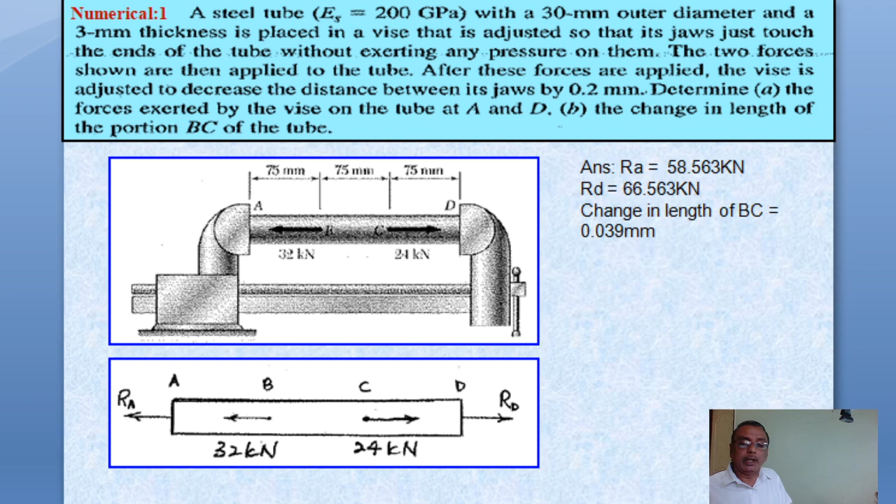Now let's see that numerical. First note down, we will collect the data. So here outer diameter D0 is equal to 30 mm, inner diameter Di is equal to 30 minus twice t, so it becomes 30 minus 6, so that is 24 mm.

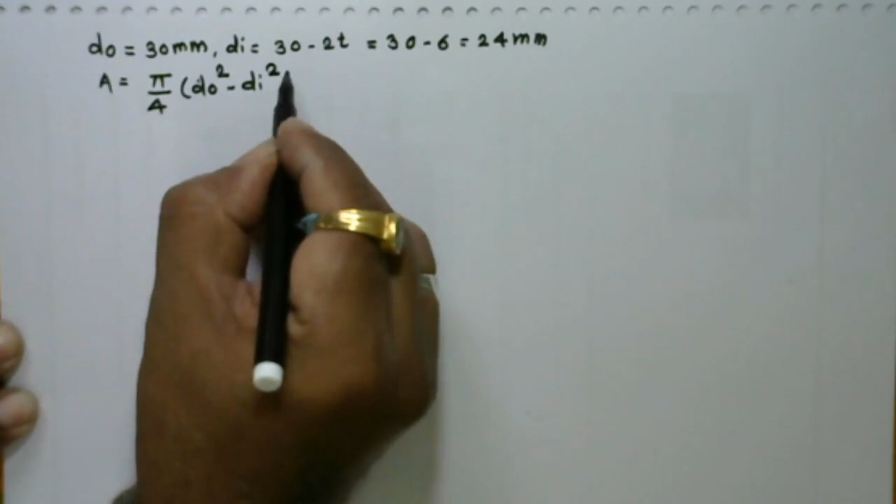Diameter is known, so we may calculate the cross sectional area. Area is equal to pi by 4 times D0 square minus Di square. So pi by 4 times 30 square minus 24 square. So here area is 254.34 mm square, that is the area.

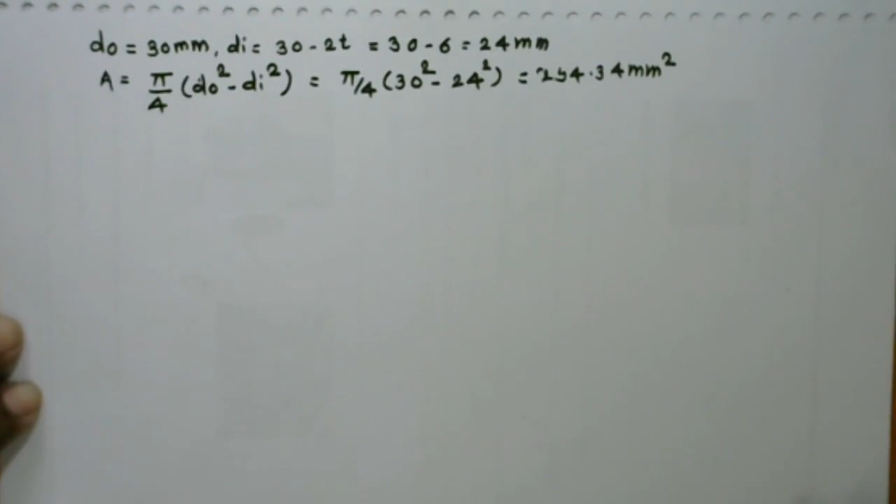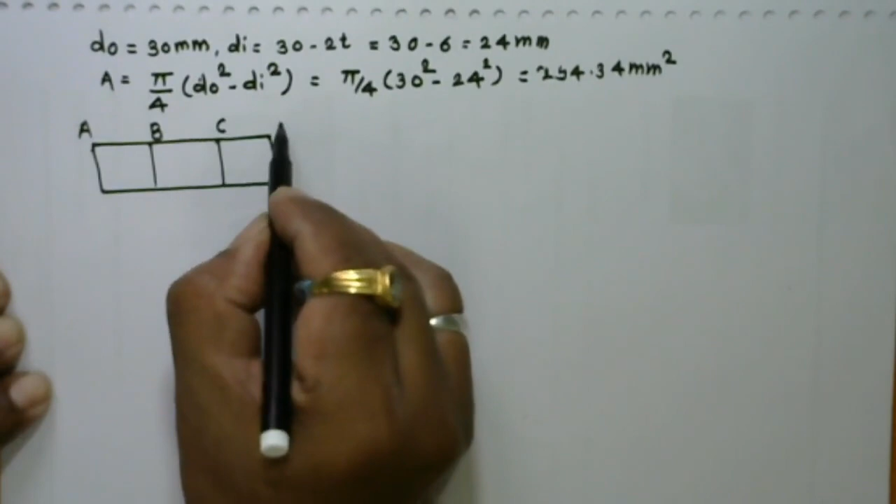Now the figure is given. In that figure we have to concentrate on this side. If we see that figure, there is section A, B, C, and jaw D. Reactions acting at point A, that is RA. Reactions at point D, that is RD. At point B, 32 kilonewton force is acting. At point C, 24 kilonewton force is acting.

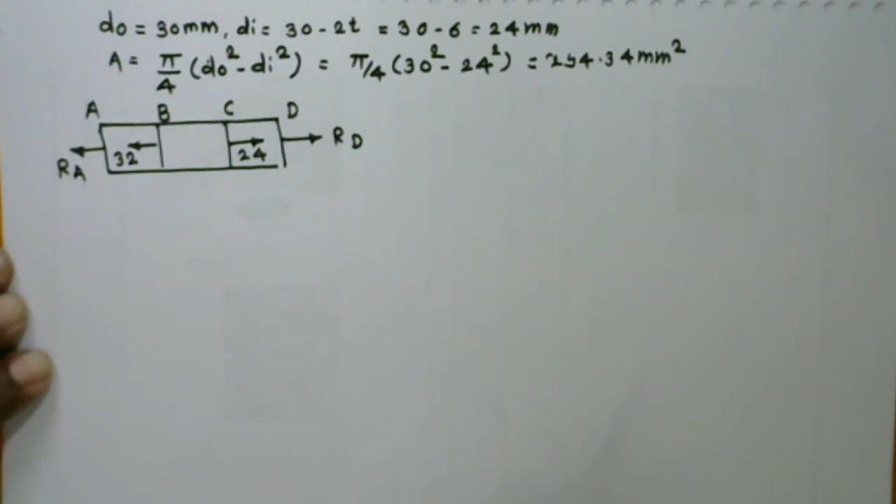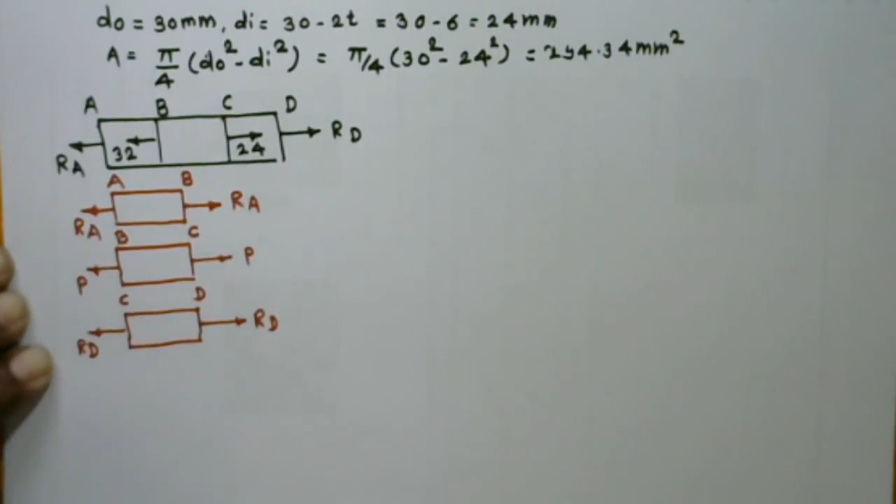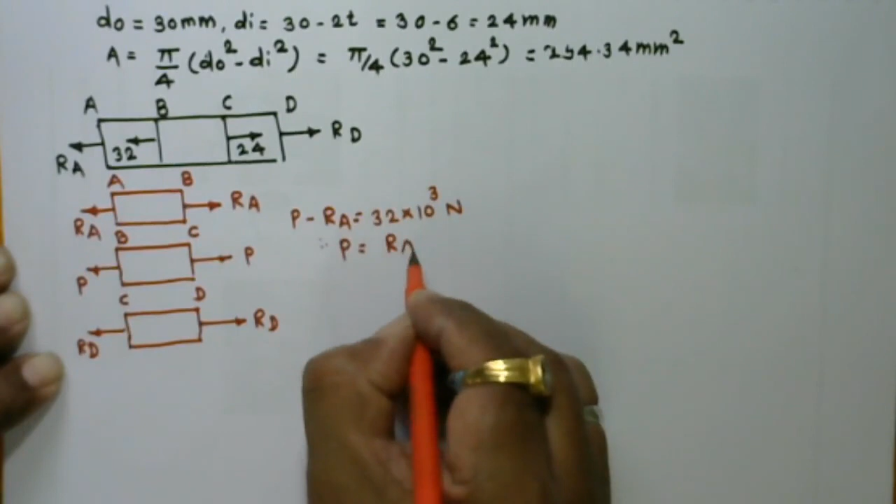According to our superposition law, we may say, if we consider section AB, on AB that is RA. At BC, we may say force P is acting. Assume the force P is acting at point C and D, reactions RD is given, is it right? At point B, 32 kilonewton is going in the left hand side. So you may write the equation at that point: P minus RA is equal to 32 into 10 raised to 3 Newton. So that equation becomes P equals RA plus 32 into 10 raised to 3. Say equation 1.

Similarly, write at point C it is 24. So we may write P minus RD is equal to 24 into 10 raised to 3. Again, P is equal to RD plus 24 into 10 raised to 3.

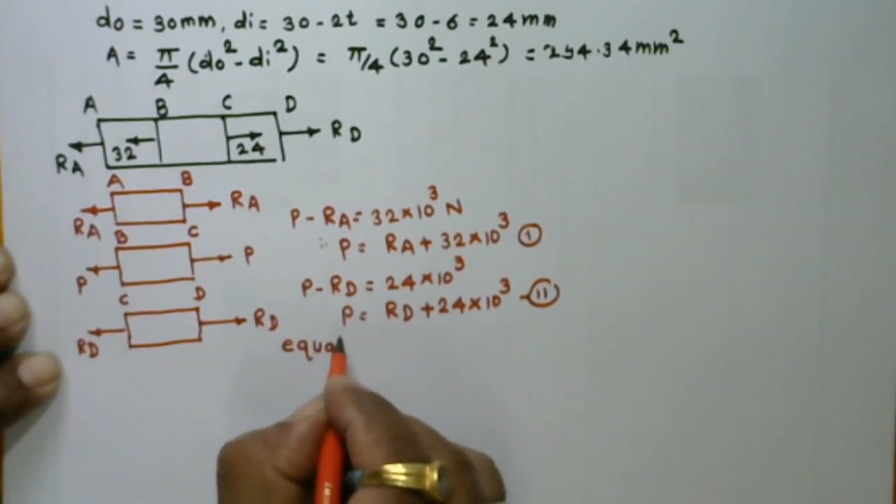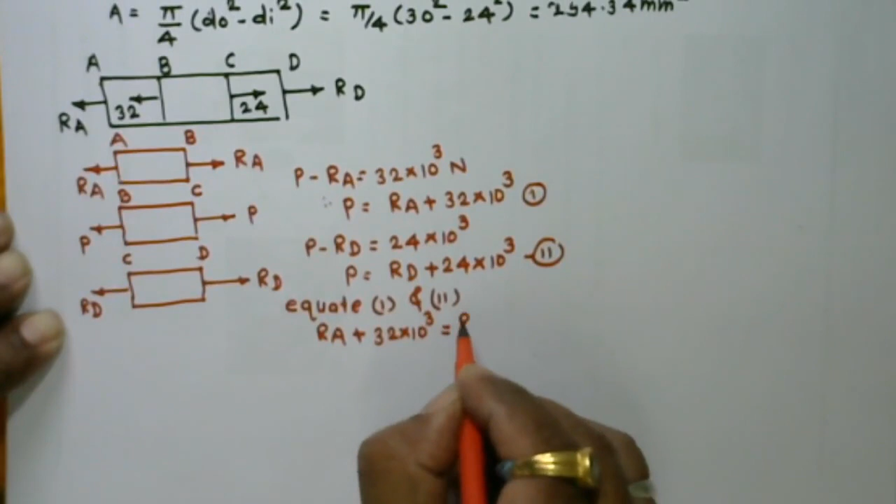So you may equate equation 1 and 2. In that case, RA plus 32 into 10 raised to 3 is equal to RD plus 24 into 10 raised to 3. If I say RD is equal to, we may calculate RA plus 32 into 10 raised to 3 minus 24 into 10 raised to 3. So that equation becomes RA plus 8 into 10 raised to 3, that is RD. Say equation number 3.

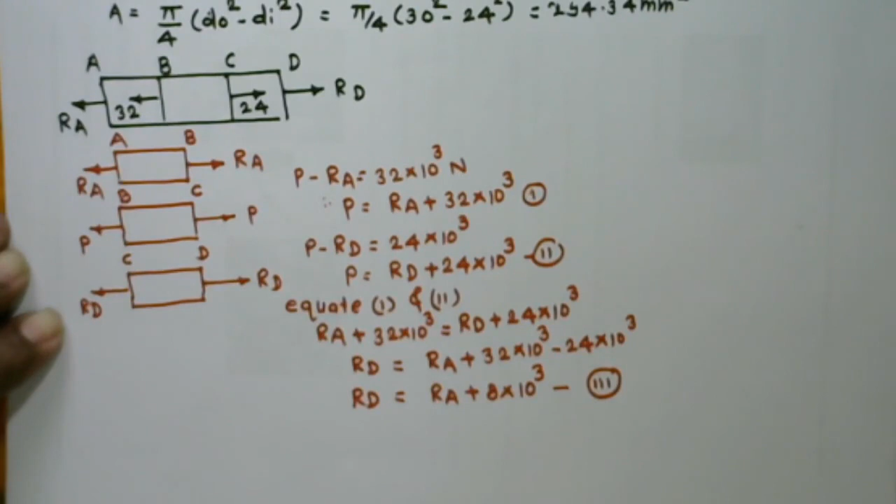Now delta LAB, elongation at the end AB, delta LAB, we may write that force RA is acting on A, so we may say RA into LAB, that is PL upon AE, same equation we have to use. AE, RA is unknown, LAB is 75 mm, distance is given, cross sectional area we have already calculated as 254.34, and E is given as 200 into 10 raised to 3. So that equation becomes 1.474 into 10 raised to minus 6 RA.

Similarly, delta LBC, on BC force P is acting, P into LBC upon AE, P is unknown, length LBC is 75 mm as given in the numerical, divided by area 254.34 into 200 into 10 raised to 3. Instead of P, you may put the value RA plus 32 into 10 raised to 3, or you may put the RD value also here.

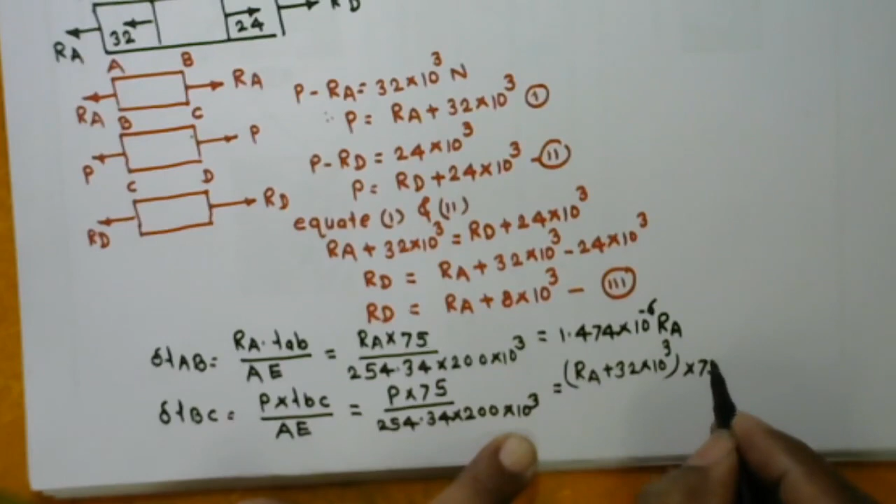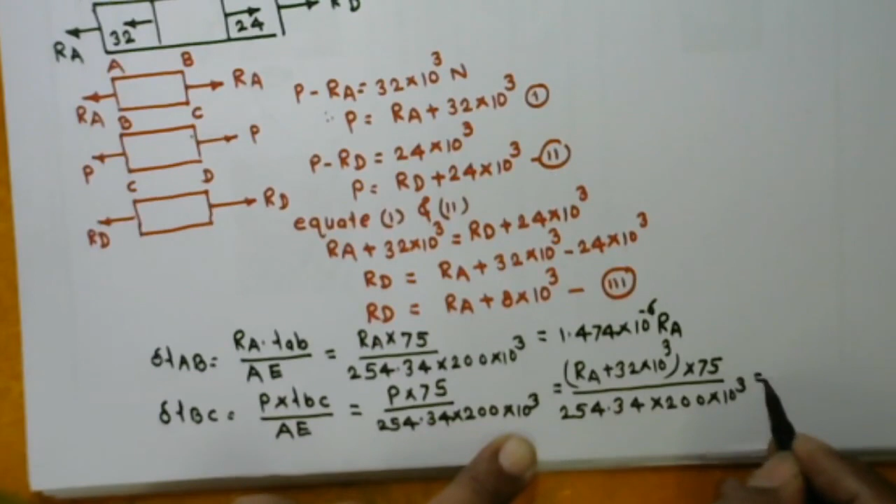So RA plus 32 into 10 raised to 3 into 75, divided by 254.34 into 200 into 10 raised to 3. So here you will get 1.474 into 10 raised to minus 6 RA plus 47.18 into 10 raised to minus 3.

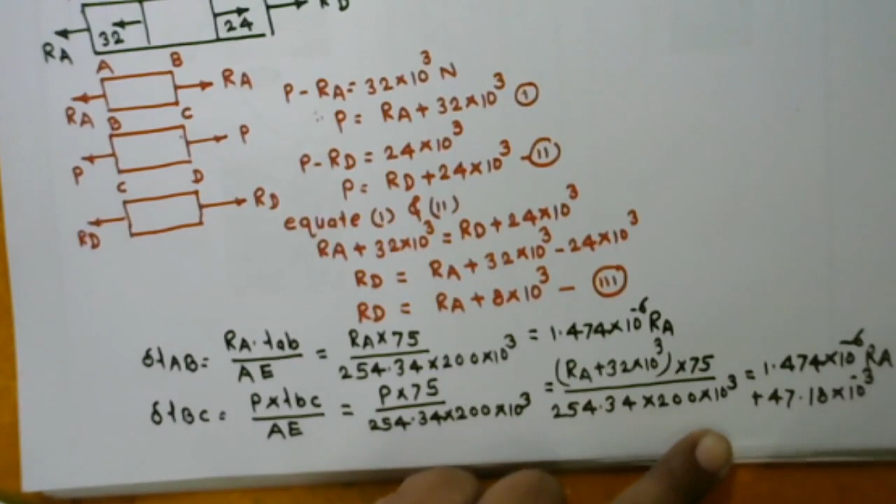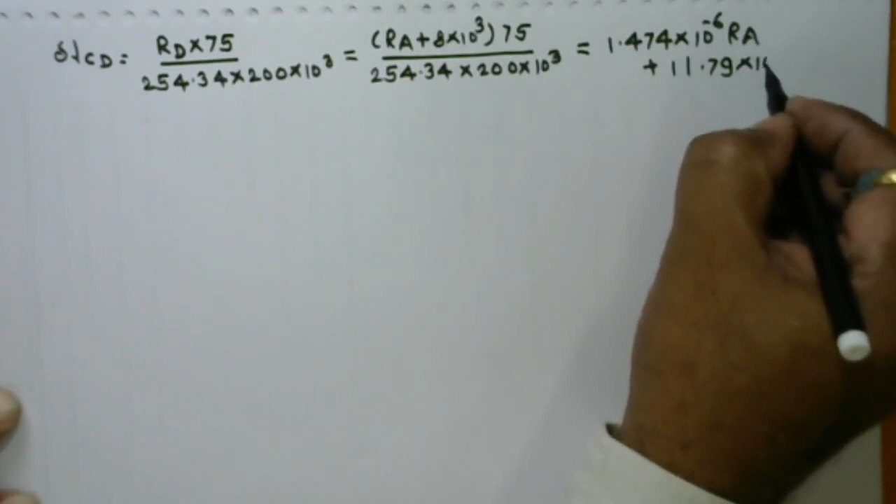Similarly, we may calculate delta LCD. At CD, force is acting RD, again length is here 75, area remains same, 254.34 into 200 into 10 raised to 3, that is same. So here RD is equal to, you may put RA plus 8 into 10 raised to 3 into 75 divided by 254.34, 200 into 10 raised to 3. Do these calculations. After that you will get 1.474 into 10 raised to minus 6 RA plus 11.79 into 10 raised to minus 3, the value of delta LCD.

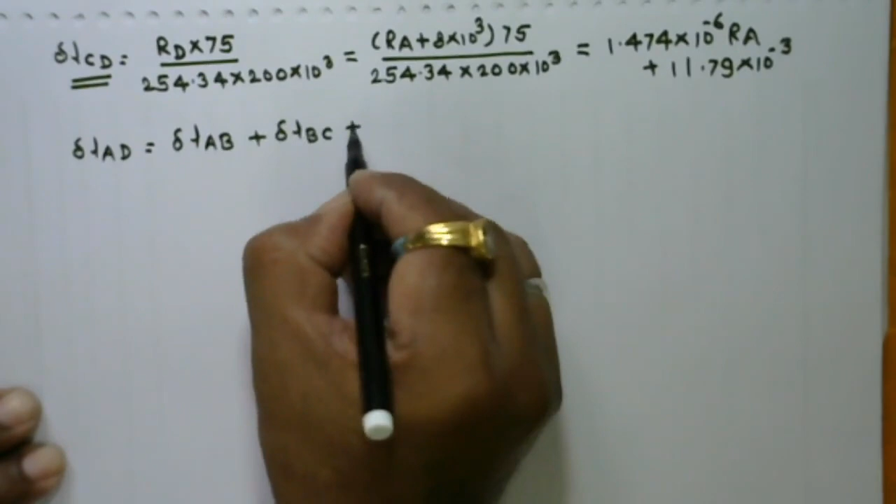Now here total elongation delta LAD is equal to delta LAB plus delta LBC plus delta LCD. Put all this value: 1.47 into 10 raised to minus 6 RA plus again 1.474 into 10 raised to minus 6 RA plus 47.18 into 10 raised to minus 3 plus 1.474 into 10 raised to minus 6 RA plus 11.79 into 10 raised to minus 3.

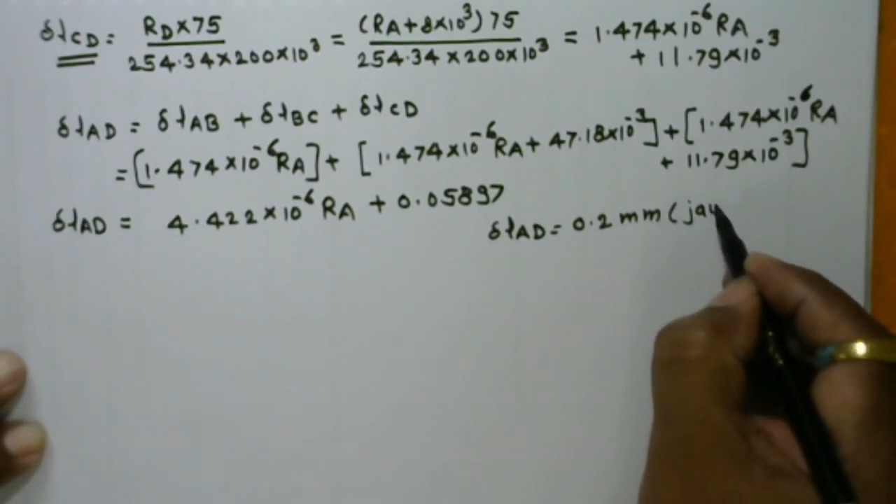So that equation, after this delta LAD you will get 4.422 into 10 raised to minus 6 RA plus 0.05897. So here delta LAD, it is given 0.2 mm. It's a jaw movement, so it is in compressive manner, so we have to take that value minus 0.2 because it is closing to each other. minus 0.2 is equal to 4.422 into 10 raised to minus 6 RA plus 0.05897. Unknown value is only RA.

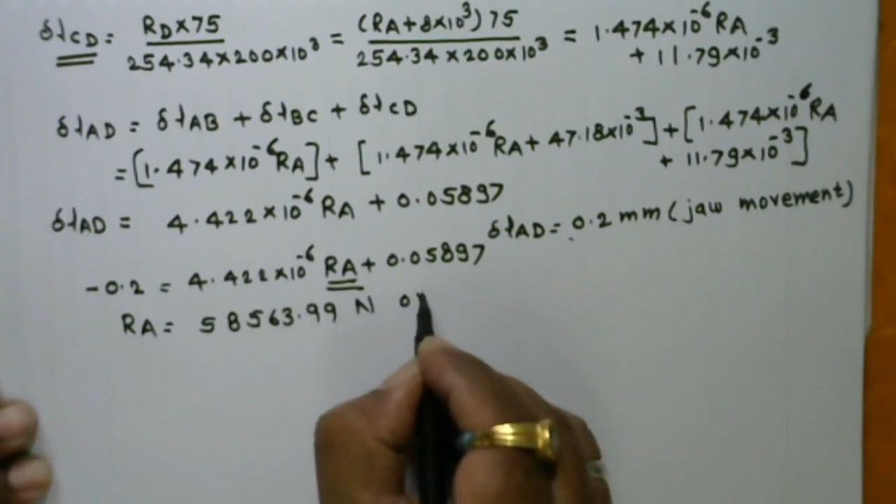You will get the value of RA here. RA is equal to 58,563.99 Newton, or you may write 58.563 kilonewton. Then delta LBC, our second answer, 1.474 into 10 raised to minus 6.

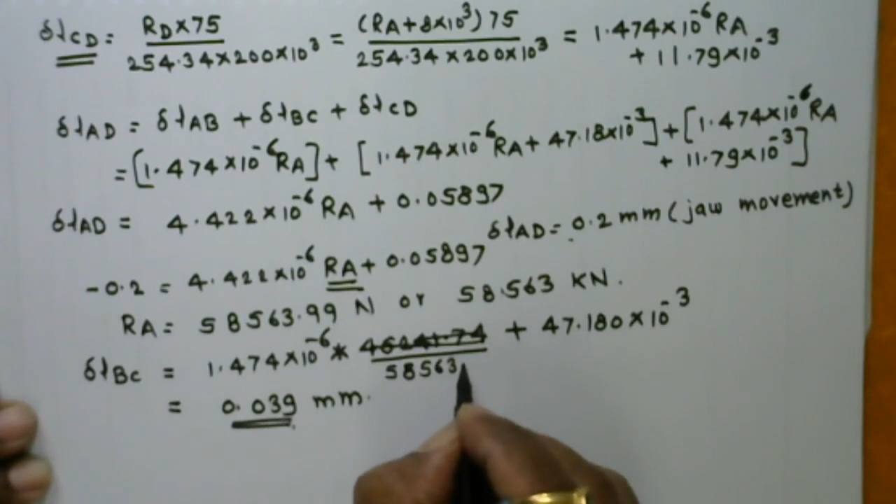Put this value here, that is 46241.74 plus 47.180 into 10 raised to minus 3. So that value you will get 0.039 mm. Okay, you have to check that value. That value is not 46. This value will be 58,563.99. So after that you will get the value 0.039 mm.

Okay, now come to our second numerical. Three steel rods, E is equal to 200 GPa, support a 36 kilonewton load. Each of the rods AB and CD has 200 mm square cross sectional area and rod EF has a 625 mm square cross sectional area.

Neglecting the deformations of the rod BED, determine the change in length of the rod EF and stresses in each rod. Here FBD is given. In that case, 3 links, AB link, CD link having the equal length, whereas link EF having 400 mm. Force P is acting at the center, and according to that force we have seen here, you may see the force PAB is the force acting at link AB, P is load acting at point E, PCD is the force acting at point CD, and PF is the force at EF.

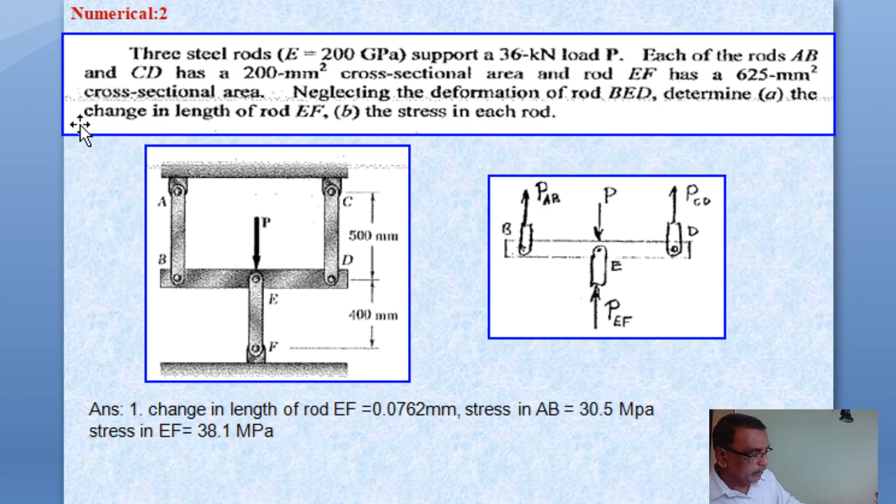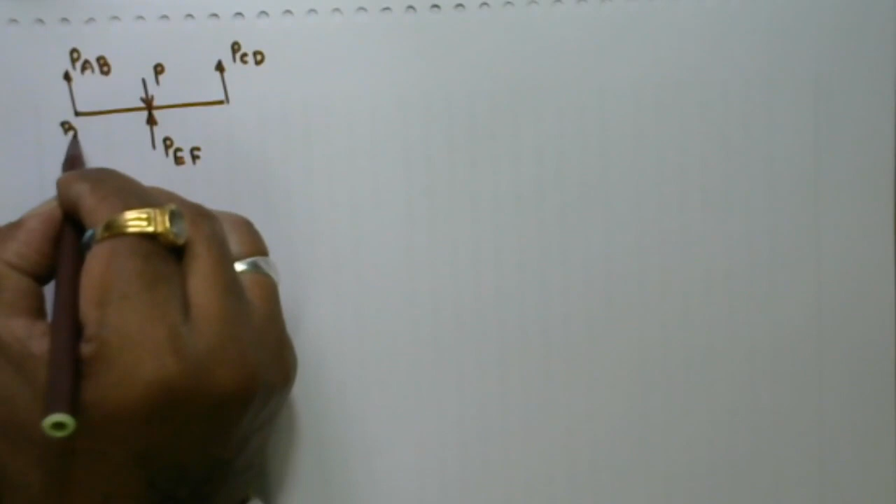Okay, now FBD free body diagram, we may say here, according to that free body we simply, that is in that manner: PAB at point CD, that is PCD, at center force P is acting, and at point E another force reaction, that is PEF is acting. In this case we say this point is B, this point is E, and this point is lastly D.

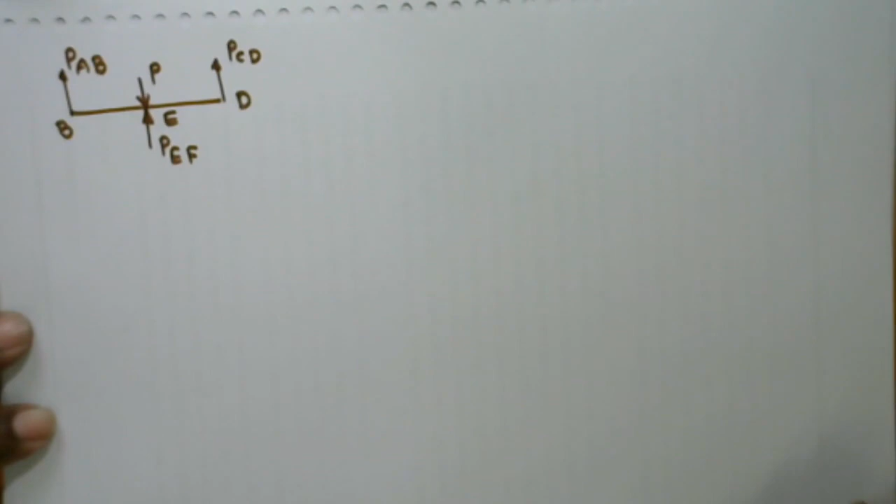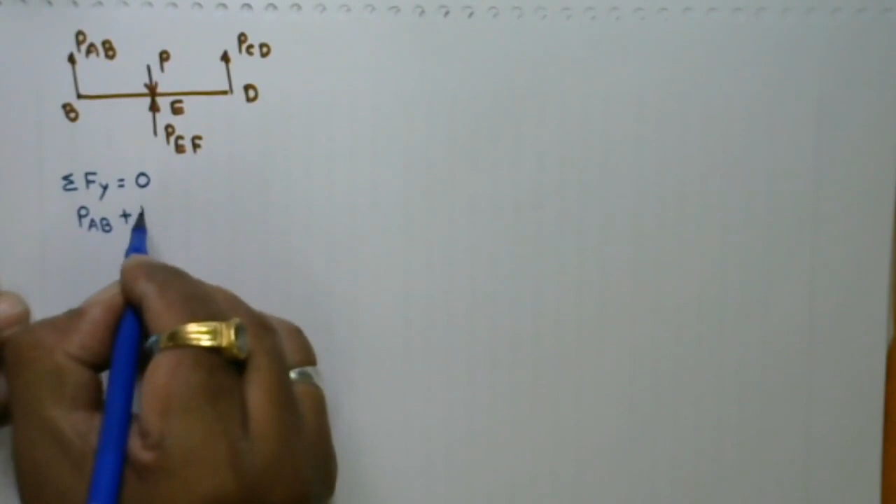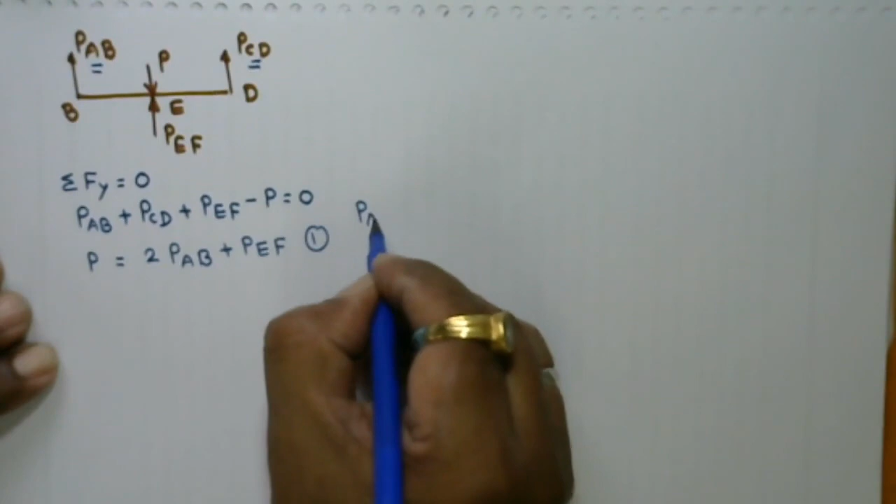So if we say the symmetry and apply the equilibrium conditions, that is here summation Fy is equal to 0, because all forces are acting vertically. So in that case you may write the equation PAB, upward forces positive, plus PCD plus PEF minus P is equal to 0. So in that case you may write P is equal to PAB and PCD, both are equal. So you may write the equation twice PAB plus PEF, say equation number 1, because PAB is equal to PCD.

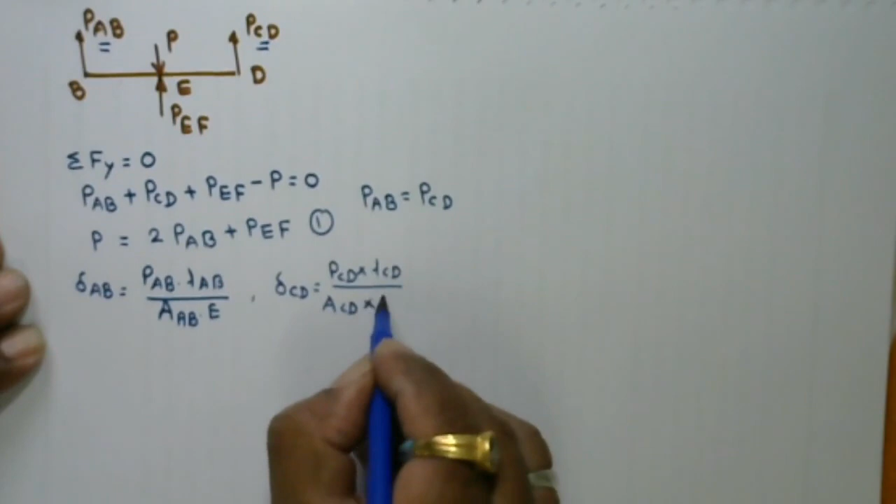Similar way, deformation of individual length, that is delta AB, the force acting on that link AB is PAB, so PL upon AE, so PAB into LAB divided by AAB into E. Similarly delta CD, force acting on it PCD into LCD divided by area of link CD into E. Similarly delta EF is equal to force acting on it PEF into LEF divided by area of the link EF into E.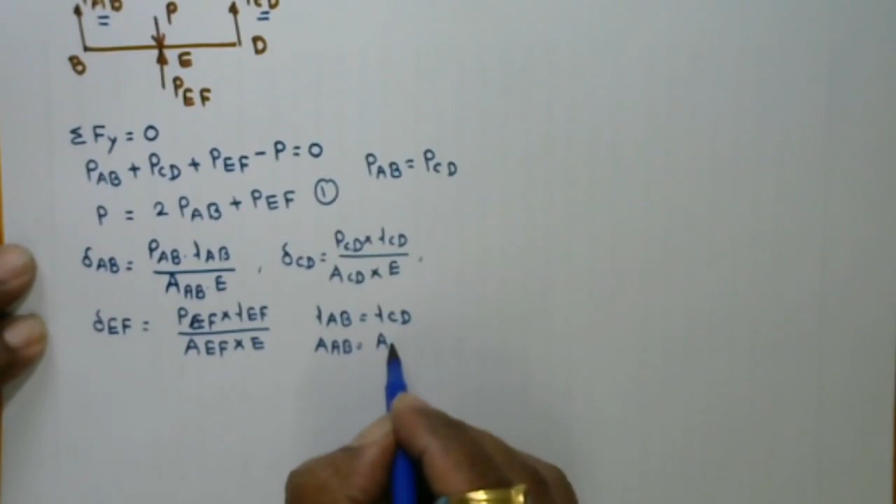Here length LAB is equal to LCD, it is already given. Area AAB is equal to area ACD, it is also given.

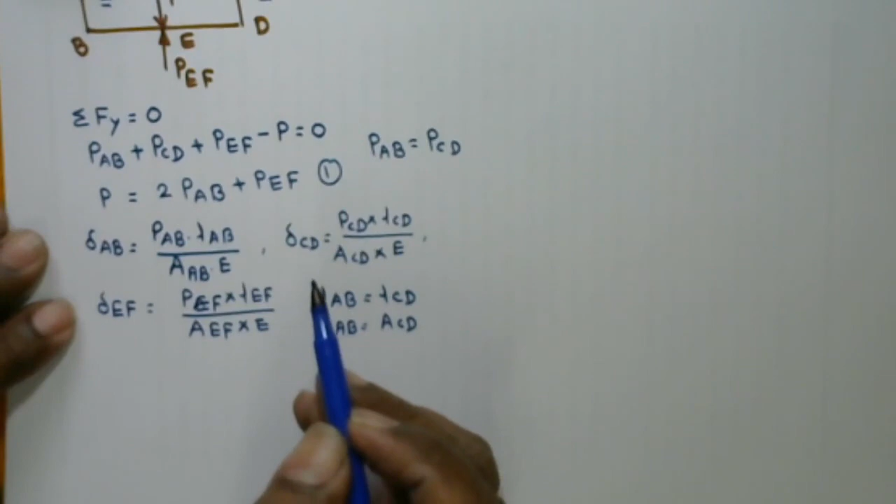So now points A, C and F are the fixed points, and the members B, E, D form a rigid bar. So we may say that the deflections at point AB is equal to deflections at point EF. So we may write the equations.

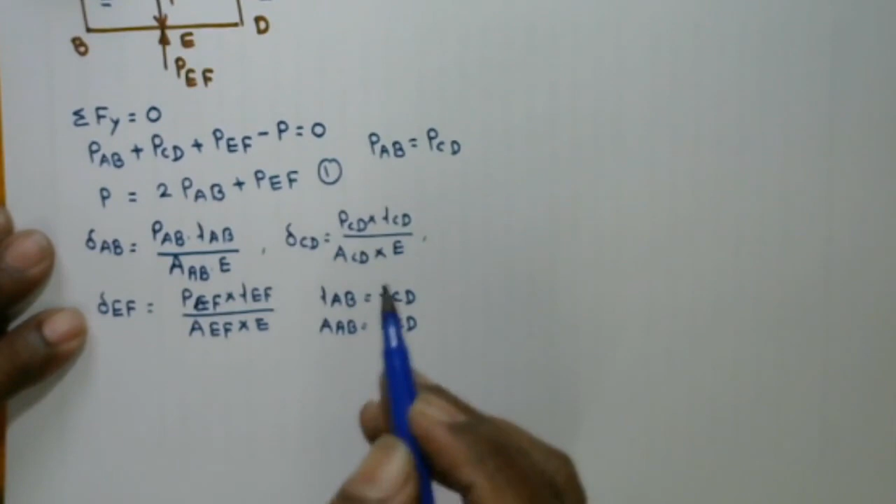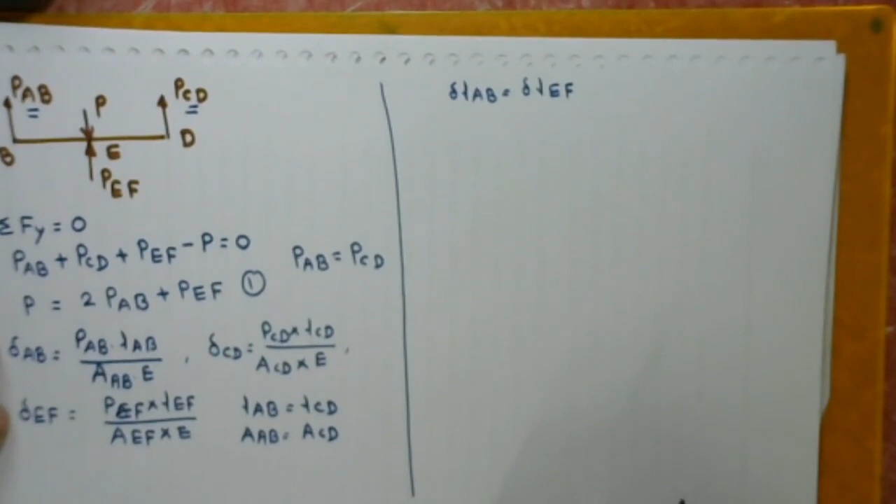Delta L AB is equal to delta L EF. That is, the deflections of the AB link will be equal to the deflections of the EF link. That's why we have taken elongations of the link AB equal to elongations of the link EF.

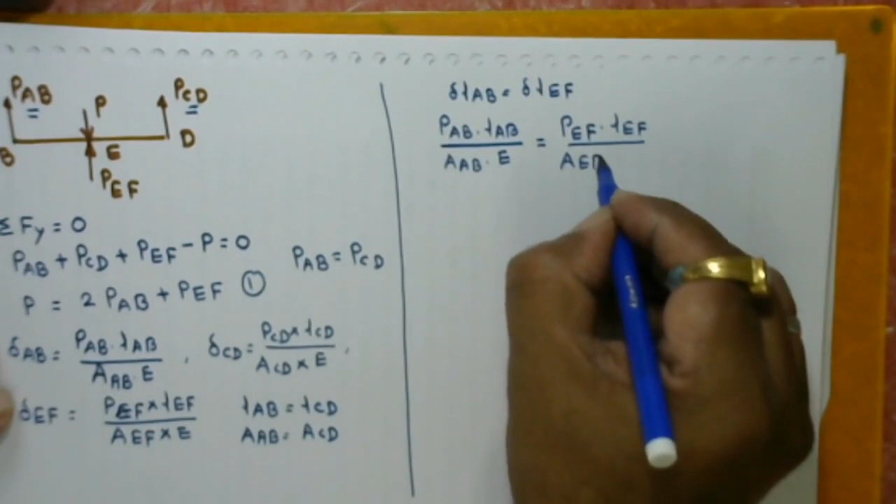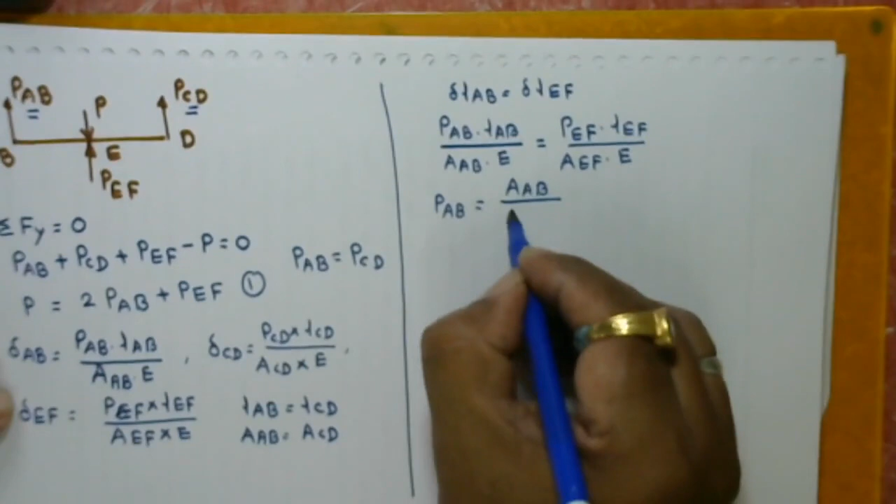So put this value: PAB into LAB divided by AAB into E is equal to PEF into LEF divided by AEF into E. So PAB is equal to, simplifying these equations, AAB divided by AEF into LEF divided by LAB into PEF. So that area is given to you.

Put this value into 400 divided by 500 into PEF. So we will get here one relation: PAB is equal to 0.256 PEF. That is our relation.

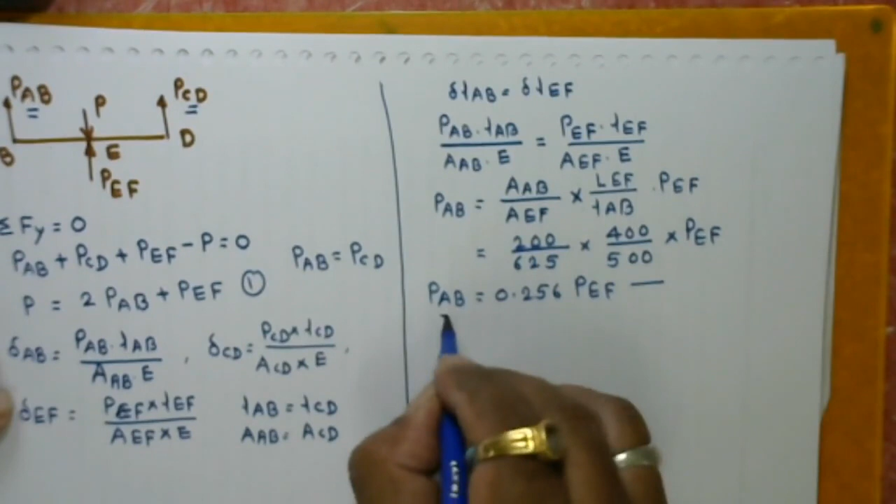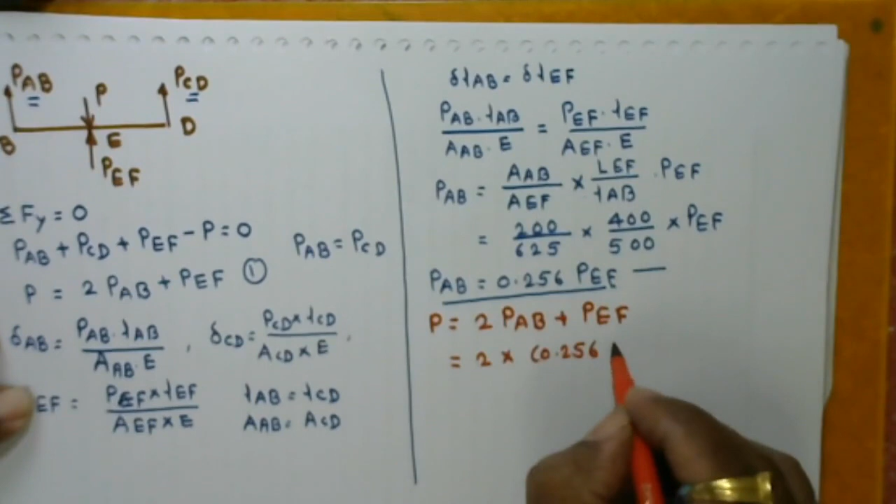Now P is equal to, we may write the equation, twice PAB plus PEF. So we put this value here: two into 0.256 PEF plus PEF. So P is equal to 1.512 PEF. So PEF is equal to P divided by 1.512.

P is given as 36 into 10 raised to 3, converted into Newton, divided by 1.512. So that becomes 23.810 into 10 raised to 3 Newton.

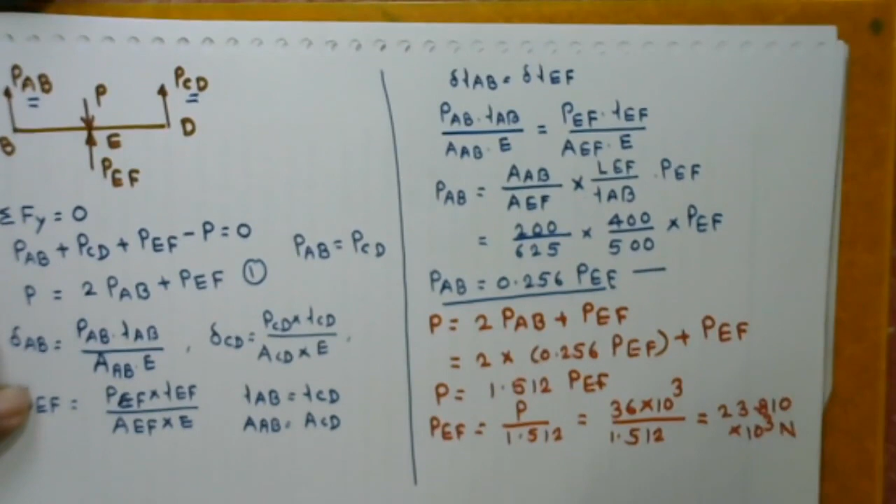So PAB is equal to PCD is equal to, according to that equation, 0.256 into 23.810 into 10 raised to 3. So that value is 6.095 into 10 raised to 3 Newton.

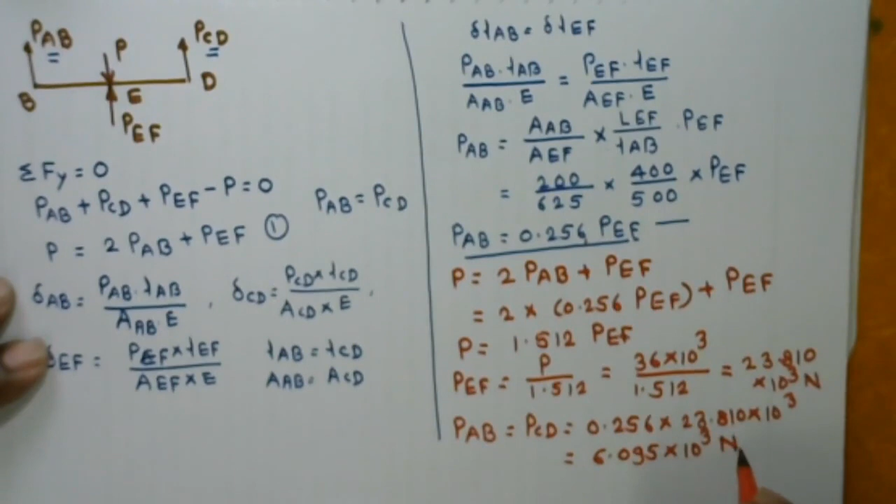Now we have to calculate delta. So delta EF is equal to, we know PEF into LEF. So PEF we already calculated: 23.810 into 10 raised to 3 into 400, divided by 200 into 10 raised to 9, converting into meter.

That value is 625 into 10 raised to minus 6; you have to also convert into meter. So you will get that answer into meter, and that is 76.2 into 10 raised to minus 6 meter, or you may convert into mm: 0.0762 mm. You may use directly that value 400.

Here you may use 200 into 10 raised to 3 and 625, so your answer should directly be in mm, that is 0.0762 mm. That is delta EF.

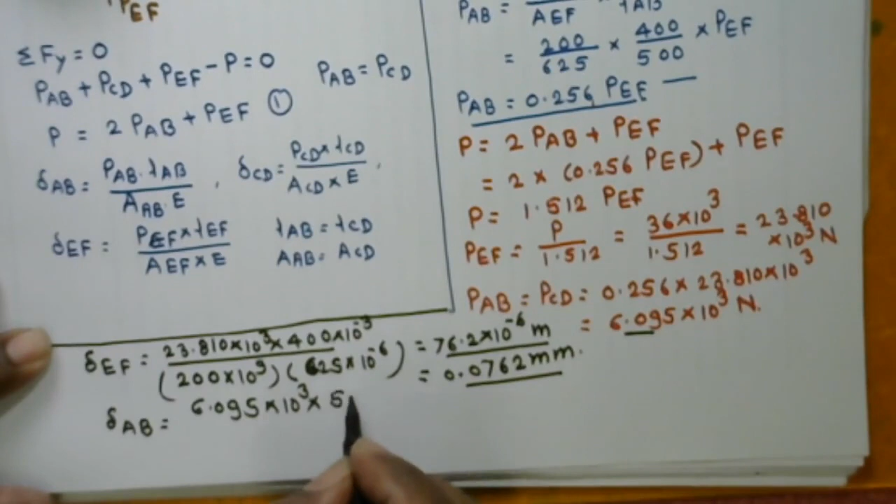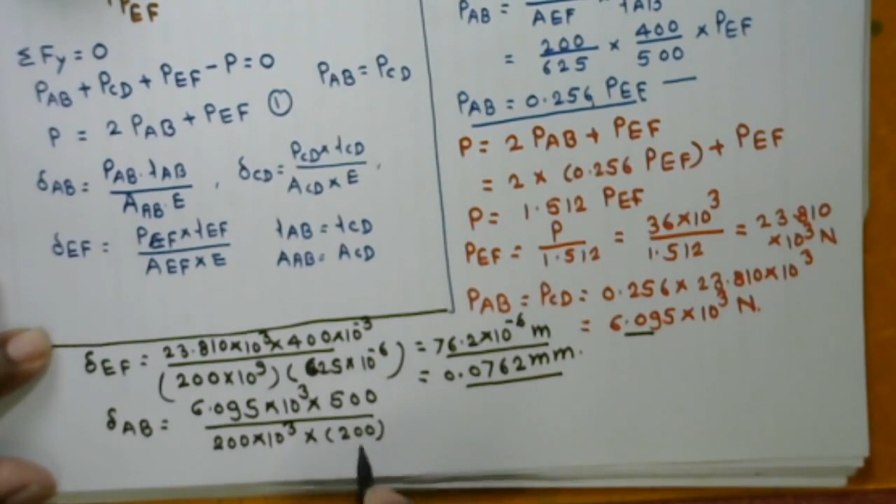Similarly, you have to calculate delta AB. So here load PAB is 6.095 into 10 raised to 3. Length is given as 500, E is known as 200 into 10 raised to 3; I am taking in mm now for your practice, into 200. So by that equation, your answer again is 0.0762 mm.

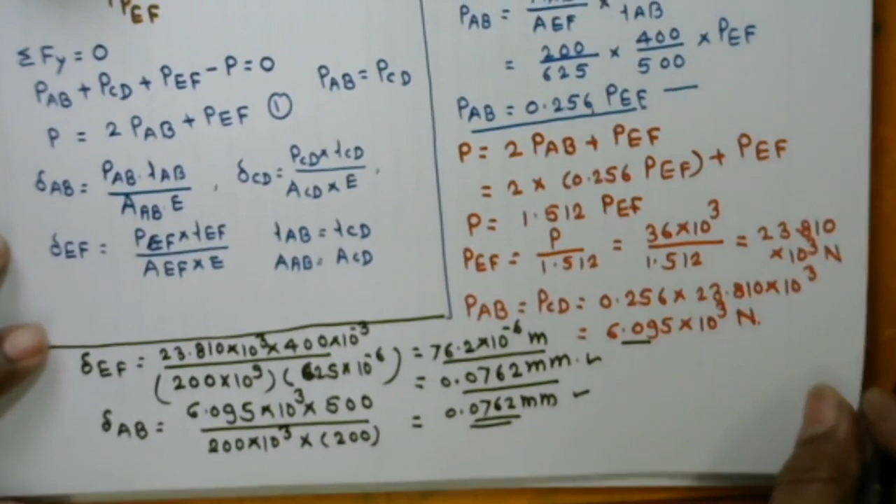So now this deflection is the same. Is it right? Okay. Now we have to calculate stresses acting at the link AB and EF. So sigma AB is equal to force upon area; force acting is PAB upon cross sectional area AB.

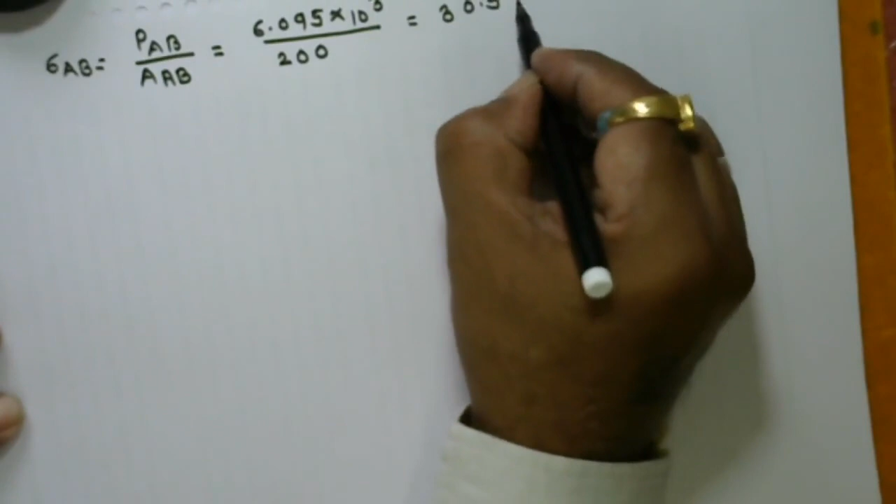So force acting is 6.095 into 10 raised to 3, and its cross sectional area is given as 200. So the answer is 30.5 Newton per mm square, or you may write that as megapascal, 30.5.

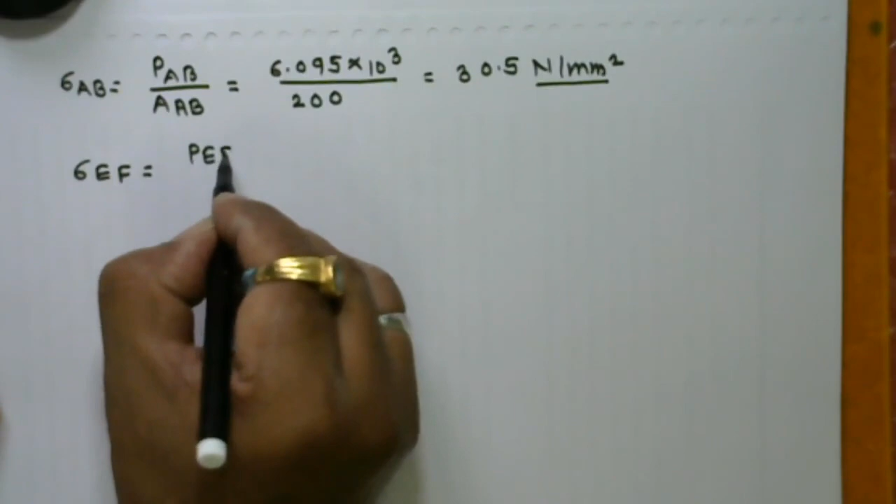Similarly, stress acting at point EF: PEF upon AEF. So PEF is 23.810 into 10 raised to 3, and cross sectional area is 625. So this becomes 38.1 Newton per mm square.

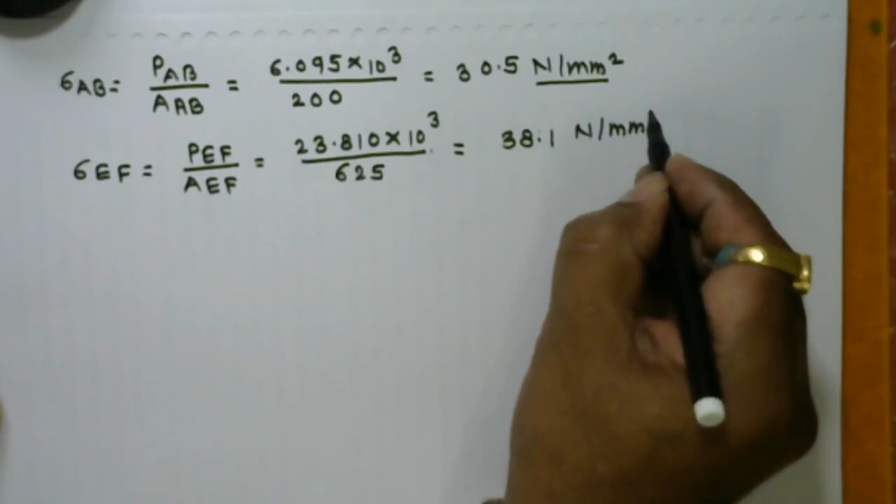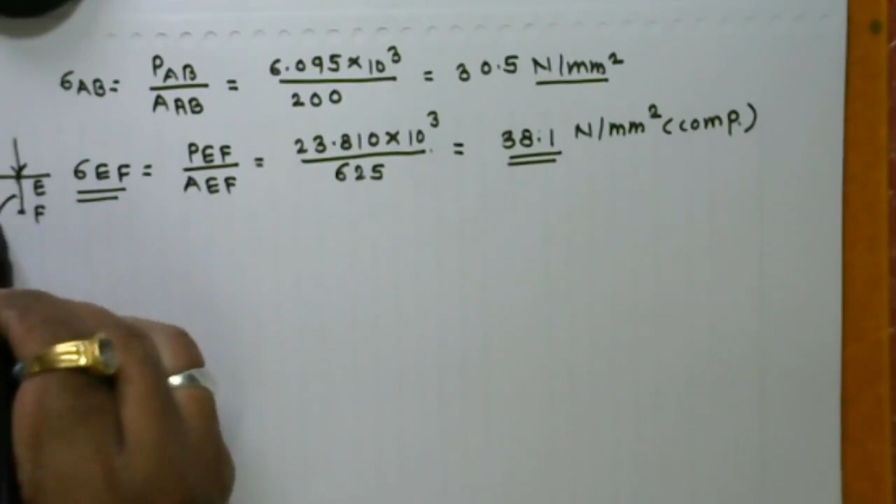Now in that case, this stress is compressive in nature, because the force is acting on that side, this is the link EF. So in that case, compressive stress is induced in the section.

Now come to the third problem. A horizontal beam AB is supported by two cables, CE and DF, as shown in figure. Calculate the value of P when the strain in DF is equal to 0.0003. Assume that beam AB does not bend. Modulus of elasticity for the aluminium EAL is given as 69 GPa, and for steel it is 207 GPa. Now observe this figure: two bars are rigidly fixed, one made from aluminium, another bar made from steel.

Both having the same cross sectional area, that is 600 mm square. Steel also having 600 mm square, and the elongation or strain induced in bar DF is given as 0.0003, with the condition that the bar should not bend. In that case, we have to calculate the value of P.

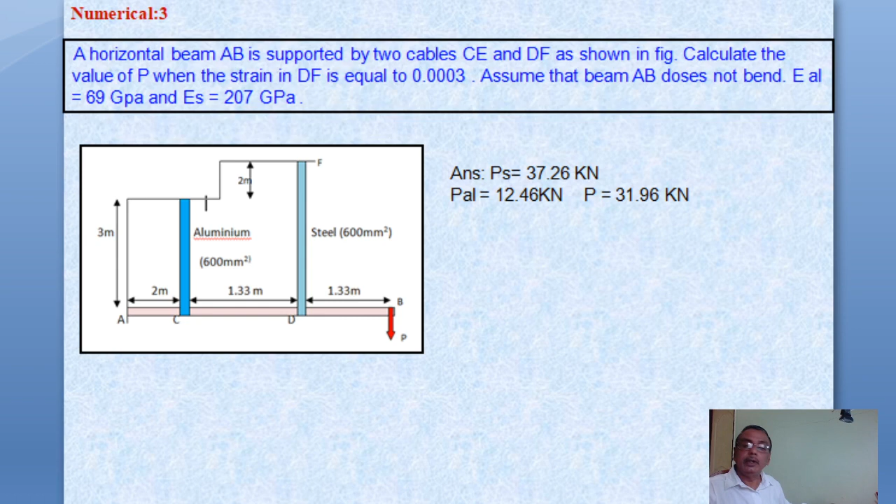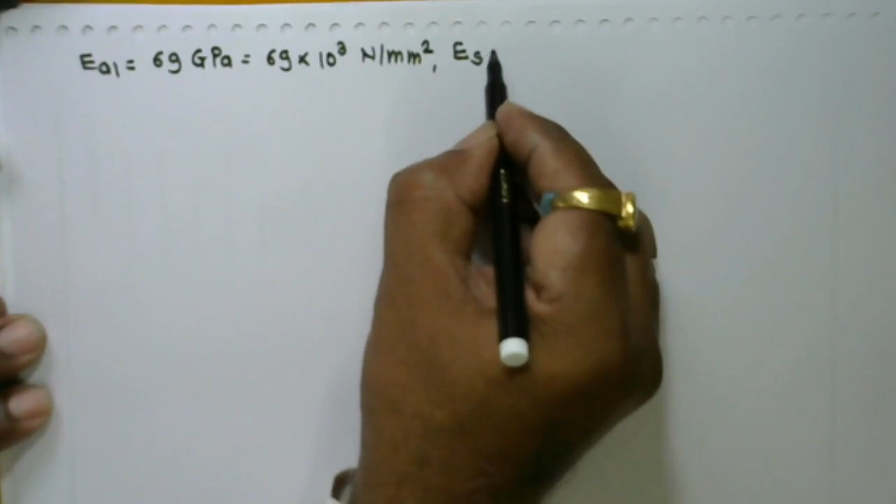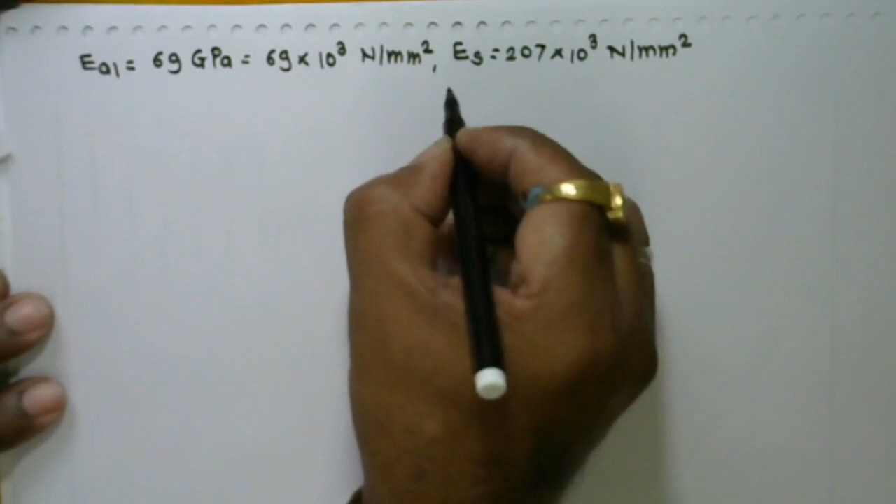Now first we have to draw its FBD, and note down the given data. For aluminium, modulus of elasticity EAL is given as 69 GPa, convert into 69 into 10 raised to 3 Newton per mm square. Similarly, for steel it is given as 207 into 10 raised to 3 Newton per mm square. Strain in DF is also given as 0.0003; it is a strain, so there is no unit, and in that case we concentrate on that figure again.

Figure is in this manner.

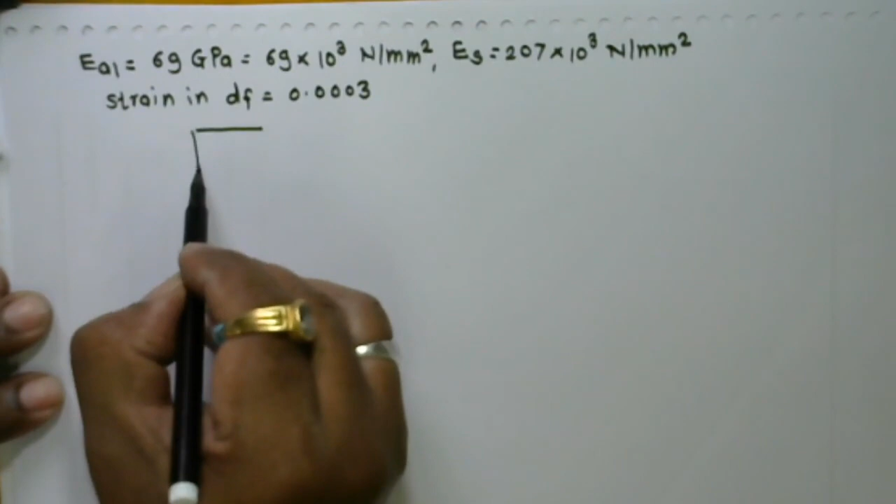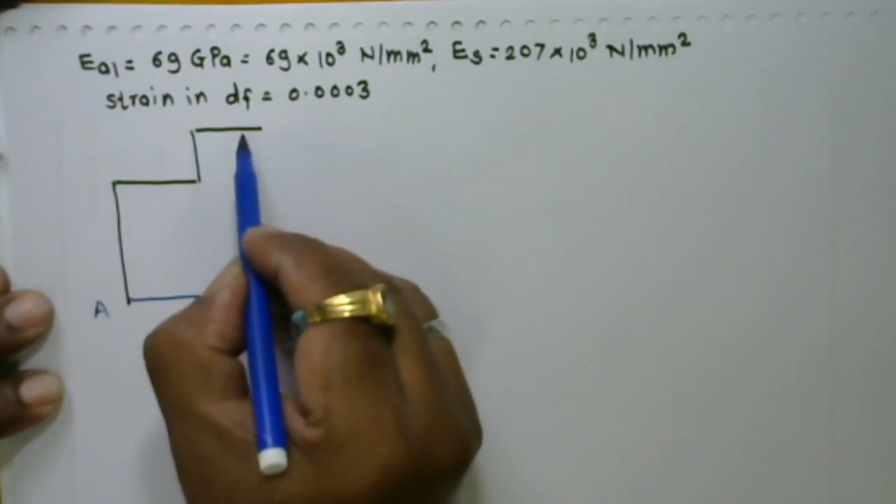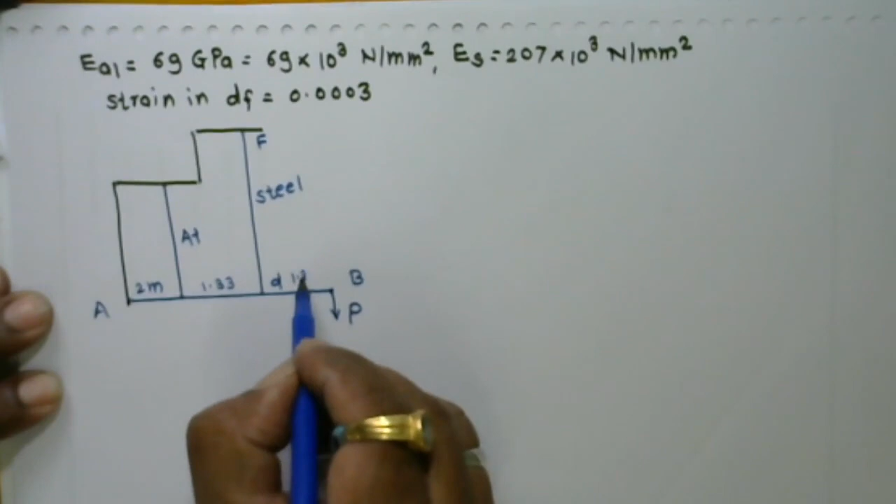Point A, this is the bar, here B point, force P is acting on that side, this is D, F. This bar is made from aluminium, this one is made from steel. Dimensions given: 2 meter, distance between this 1.33 meter, again here 1.33 meter. Length of the aluminium bar is 3 meter.

These dimensions are 2 meter, so steel having the length, steel having the length 5 meter, aluminium having the length 3 meter.

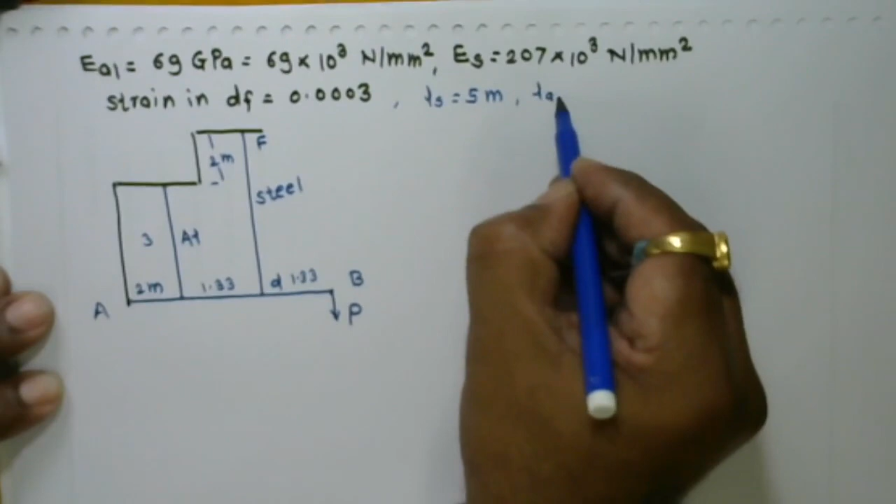Now in that case, when the deformations take place, when force P is acting, at that time this bar may deflect in this manner. So if I say here these dimensions, this is the length of the deflections of the steel bar.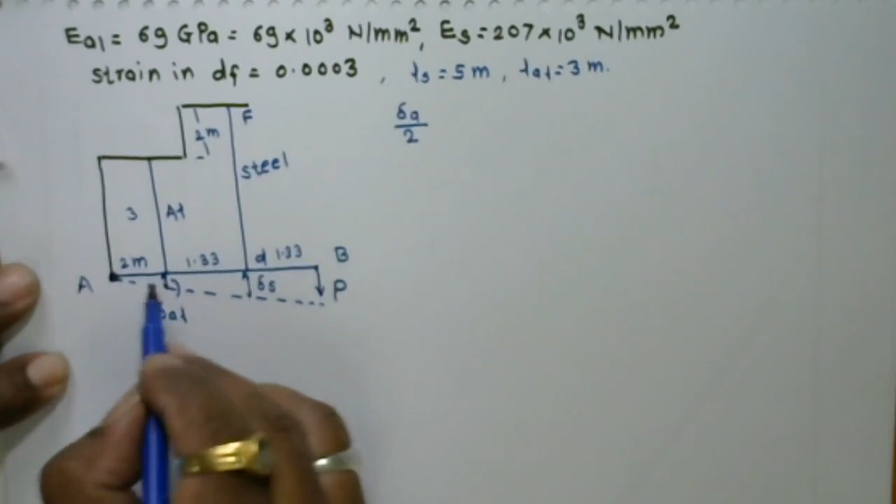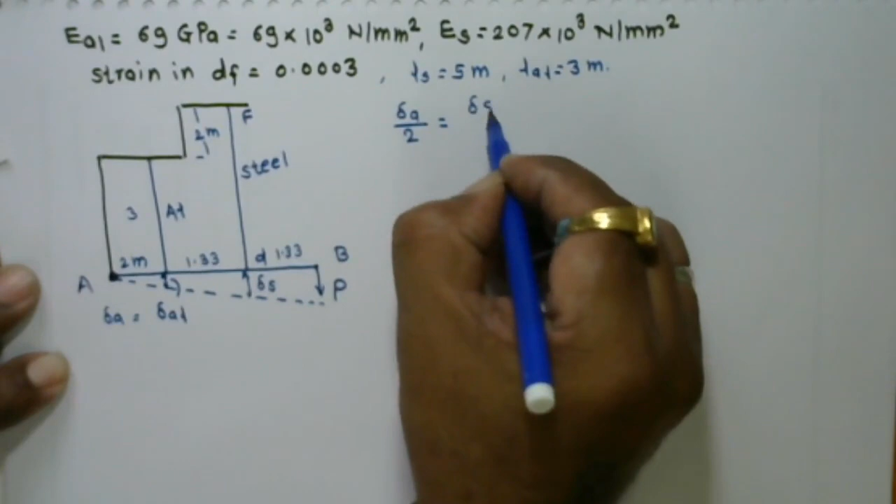Here this deflection delta AL. So according to the similarity of triangles, we may say delta A upon 2 delta AL, or delta A upon 2 is equal to delta S upon 3.33. This means these deformations take place from that fixed point over 2 meter. This deflection from 2 plus 1.33 becomes 3.33.

So therefore delta S is equal to 3.33 divided by 2 into delta A. So you get the relation delta S is equal to 1.665 delta A. Say equation number 1.

So delta S is equal to, we know the relation PL upon AE. Similarly for PS, force acting that is PS, here we may say P aluminium. So PS into length, given by PL upon AE, length of the steel is 5000. Cross sectional area is given as 600 mm square for steel, and for aluminium also.

Modulus of elasticity for the steel is 207 into 10 raised to 3. So you will get here 4.025 into 10 raised to minus 5 PS.

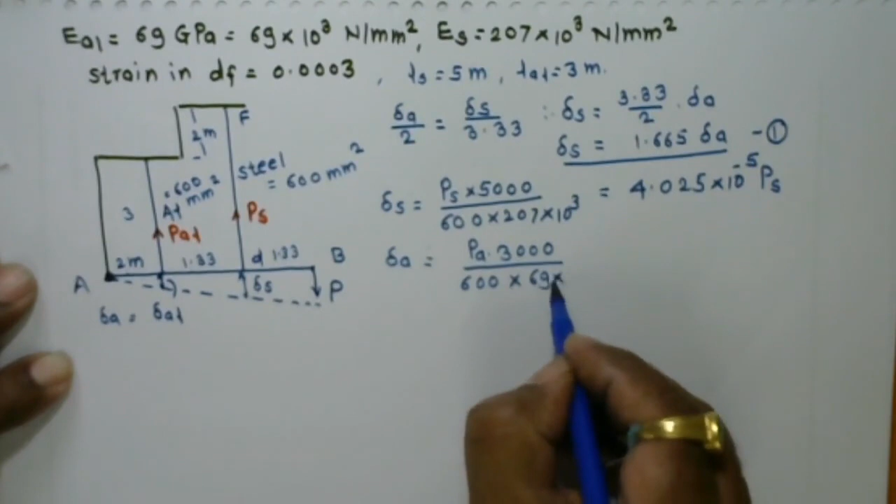Similarly, delta aluminium we may calculate, load acting on that is PA. Length is given here 3000. Area remains same. Modulus of elasticity given 69 into 10 raised to 3. So 7.25 into 10 raised to minus 5 PA.

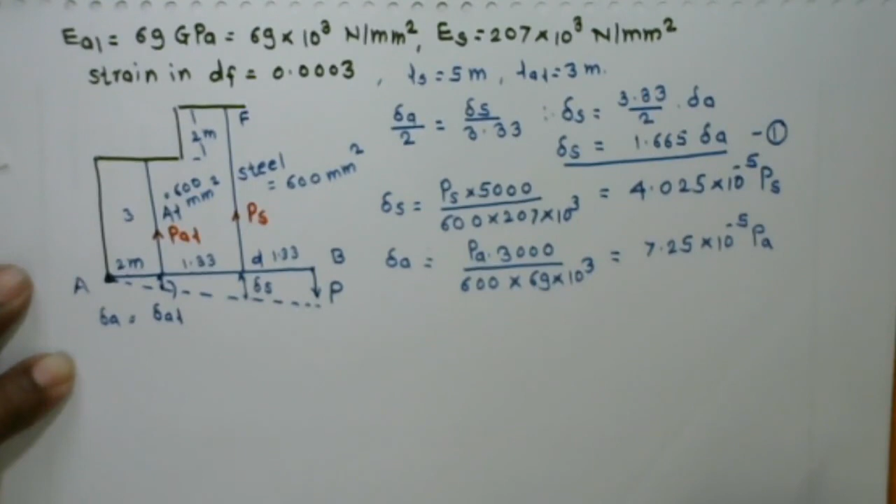So we know the relation delta S is equal to 1.665 delta A. So here delta S is equal to 4.025 into 10 raised to minus 5 PS, is equal to 7.25 into 10 raised to minus 5 PA. So we get the relationship PS upon PA is equal to 2.99.

Now here strain in steel is given, that is 0.0003, already given. So strain in the steel bar, we know the relation stress upon modulus of elasticity.

Stress is nothing but we may put the relation PS upon AS, that is equal to sigma S into ES. So strain is known as 0.0003. PS is unknown. Area of steel is known, 600. Modulus of elasticity also known. So you may calculate PS, that is 37260 Newton.

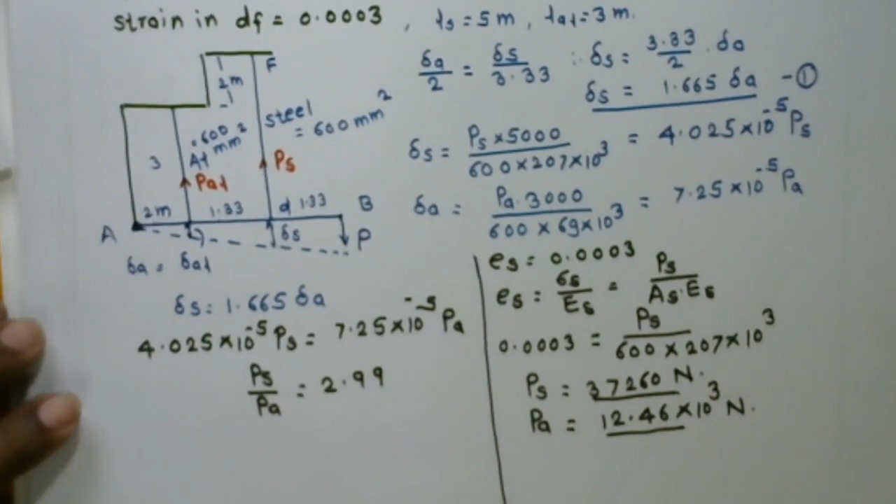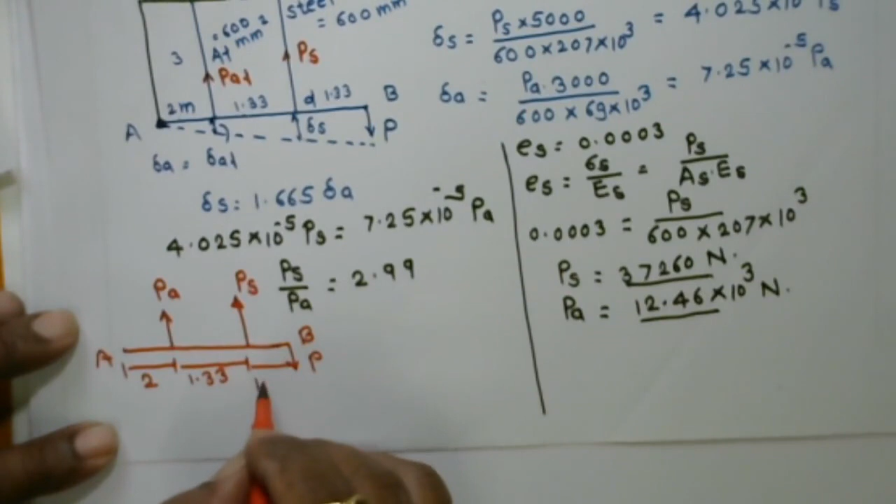So according to our FBD, if we say here this is point A, this point B, P is acting, PA, this PS. So that dimension is given 2 meter, this 1.33, and remaining this also 1.33. Now we have to calculate the value of P.

So in that case, value of P we may calculate by taking moments about point A. Taking moments about point A, moment is nothing but force into distance. So force P into total distance up to point A, 2 plus 1.33 plus 1.33, becomes 4.66. Now this moment moves in clockwise direction, whereas the moment of PS, load PS, goes anti-clockwise.

So here minus PS into its distance up to point A, 3.33, again minus for the aluminium PA, this also moves in anti-clockwise direction, into 2, is equal to 0. So put the value: P into 4.66 minus PS, 37260 into 3.33, minus 12.46 into 10 raised to 3 into 2, is equal to 0.

So P is equal to 31.96 into 10 raised to 3 Newton. That is our answer.